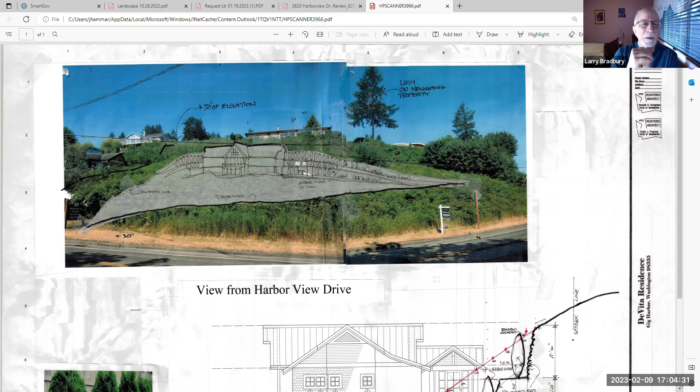Thank you. So what you're looking at on the upper, the dark black line which traverses left to right is the driveway. Approximately, that's high, it's difficult to get this to work in a perspective manner. So the driveway then goes far to the right, turns and returns back toward the house.

And that's where our two walls initially begin. The first one, the lowest one, reaches a height of just 6 feet. The second one, which is set back and is higher, I believe gets around 13 feet or so, and traverses and goes behind the house, as you see on the left-hand side of the house. Those little amoeba-shaped things up there are supposed to be arborvitae.

If you go to the lower sketch that shows the cross section on the site, you can see both walls and their landscaping fronting them, if you will, with the line that traverses across from right to left being the existing grade. And you're looking at what is going to be the grades consistent with the drawings that we submitted for permit. The final grades are there, so it doesn't extend up beyond that upper retaining wall.

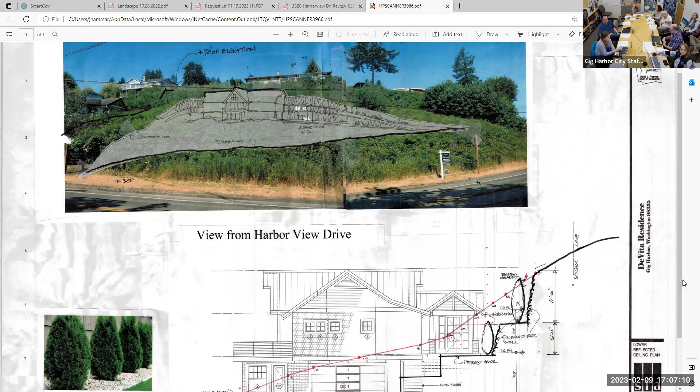Downhill of the house, there's no walls there, just landscape. That grade's all gonna have some cutting and regrading below the house, but not a whole bunch. If you go further down on this sketch, you can see there's a little bit of a cut and fill there, but it's done.

It's not very large and it follows the grades. We worked on that one - I did first, and then the civil engineer worked on it for months trying to get that to work. I think what we ended up with is the best result we could have hoped for.

Landscaping - I forgot to bring it tonight - will be roughly everything you see from the street, the curb that's there, on up the hill will all be landscaped. The plan is to create a landscape that has about 5 or 6 different colored grasses in it, with mass plantings of grasses that make this very soft. There you go, that's it right there.

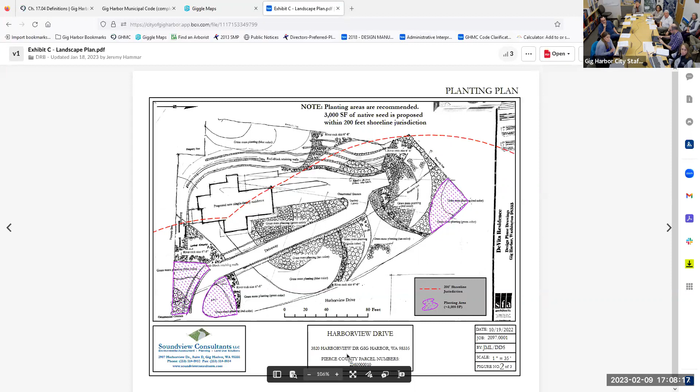That's a lot of planting, that's a lot of grass. Are we talking like bunch grass or? There's 9 different types of grass.

The kind of grass is natural, you don't have to mow it, you just have to trim it. You can see it around commercial developments, around Tacoma Mall - you'll see some of the taller ones and the smaller ones. But the idea is to create a band of color separated in 2 or 3 places with washed river rock, probably 6 to 8 inches across, so it's seen from the road in between some of these rows of plantings.

They will grow every year. You go back in and cut them in October, November, just mow them down - it's a soft landscaping approach.

It's one that, because it is grass, will help stabilize the slope, although the slope is not going to be worked in any way, except for utilizing some of that area for dispersing some of the soil that we've got - about 1,000 cubic yards. That sounds like a lot, but actually when you see it, it isn't that much. It spreads out quite evenly at about 6 to 8 inches.

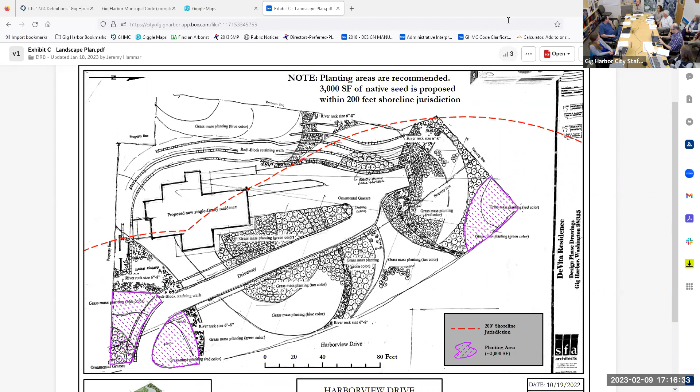Again, even with the height of it, it's just this visual, but I think when we talk about this aspect of the manual, we're really talking about working with the grade. And when you look at the cross section, the house just sits down in the hillside, so I can't think that any one of us would suggest you're not doing your best to work with the grade - it's not artificially extending out.

It looks like it does that job well. It's just the aggressive nature of that first cut. You could start working back up the hill, but you get these diminishing returns.

Yes, but you also have another factor at play here that is real strong, and that is the height requirements. Where it can be taken is about where that upper arborvitae is, and it can only be 18 feet above that point, the highest point in the buildable area. Traverse right to left, and you've got to have a maximum of 27 feet on the downhill side. So that house has been sort of mushed and squeezed to fit that envelope.

Is the highest part of that second wall, when we're looking at this perspective, you have wall to the left and you have house and you have wall coming out finishing on the right hand part of the composition. So is that the highest part? Does it sort of emerge from the house?

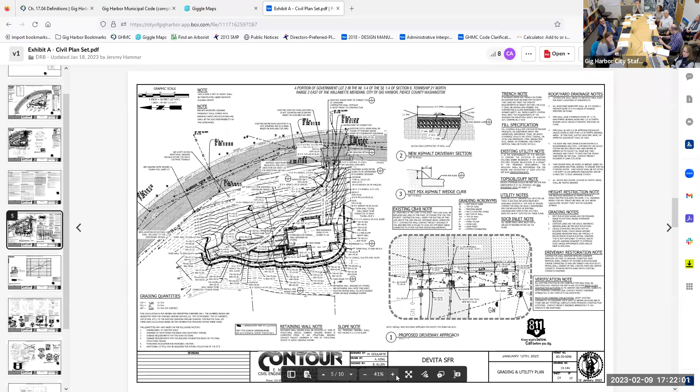Similarly, on the left-hand side, we have the lower wall, which is 6 feet, and the upper one there is about 10 feet of height, and it drops off rapidly. The height of the wall drops down. There's the two walls. In fact, the upper one disappears somewhat on the south side of the house, so you can't see it.

Okay, so I'm seeing - you read them. If we start on the left side of the upper wall, all the way over, yeah, so tapering. So you have a top of wall, the next marker, top of wall 62 and some change, and bottom wall 58. So that's like 4.5 feet, and then it gets to where your cursor is, we're talking about 9 feet roughly, 9.5 feet.

And then we're getting into maybe 11 feet. Maybe 12, almost 12, right? Yeah, right in there. And then the next one over, about there, yeah. And that one, another 12. Another 12 or 11. And then that one there, back down to 11.

Okay, yeah, and then 6, that one here. Is that 68, 73? Yeah. Upper wall down to 62. That's only 6 feet there, so that's a big drop there. Yeah, so it's about 12-ish, and it's for a little stretch in that zone.

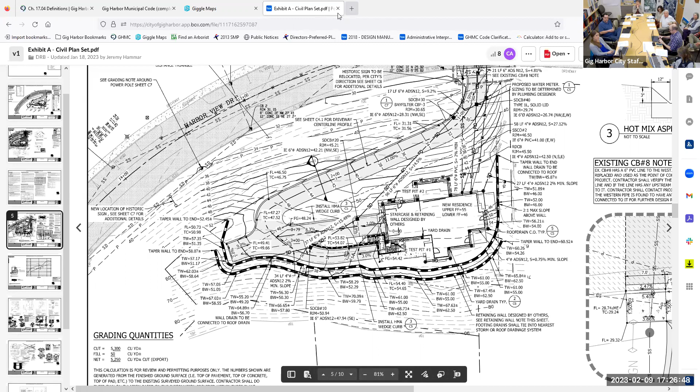Let's go back to the section through the site for a moment - Cindy, there you go, the lower one. That's the question - you see the far right-hand line, the dark line there, it comes up rather rapidly, then starts to level off. From what I understand, and I've only stood up there once, crawled up there actually, from your view up above, you probably won't see any of the arborvitae. You will see the top, the roof of the house. Yes, definitely you'll see that.

But I think the arborvitae are going to stay within the confines of the height of the wall, so as long as she keeps it - is it illustrated there? Is that an 18-foot tree in that back, or what do you have? It shows - I called it out at 11, I can't see it from here, it could be any number of different things. On the right-hand side, there's a dimension, 11.5 feet.

Okay, well, thank you for your comments. I don't know if you have any more - if you do, let me know, I'll add my own comments to it. Obviously in the View Basin, we do have height restrictions, very stringent as city standards go. In this case, 18 feet maximum height from the highest point. So basically, the way to determine it, they have buildable area, basically the setbacks. You can measure the highest point at the finished grade - that would be within that, you can go 18 feet, and then no part of the house, as you descend down, can be higher than 27 feet max. So it really pushes the house down, and I would think that although we, as a DRB, have not talked about landscaping in regards to blocking views.

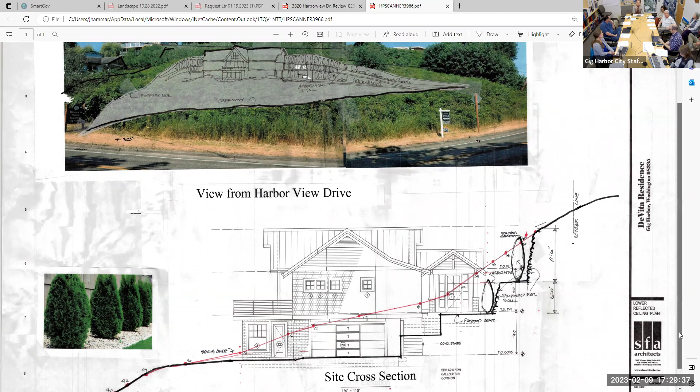Well, we actually have a covenant with this property—DeVita's kindly trimmed the trees. Thanks for educating me on that, so it shouldn't be a problem. They're hedge-like, and they can easily be manipulated and sculpted as they grow.

I think our concern is to reduce the visual impact of that wall as you're looking up from Harbor View, coming around. The pile-driven wall has a different aesthetic—it can look a little like shoring, less architectural. Part of me was thinking, could there be some kind of architectural fence or something in front of it that looks more like the flavor of the house, or an extension of the house? Because the walls often do this irregular dance up on the hillside, and once it gets that big, it almost looks like a physical form of a house, especially with the pressure treated timbers between it.

So steel columns, 6 foot on center, pressure treated timbers, and maybe less arborvitae in there. I just have a feeling it might look a little like shoring to start with, unfinished. Maybe I'm wrong, but if we had some images of shoring like that—what are you guys getting the same sense I'm getting?

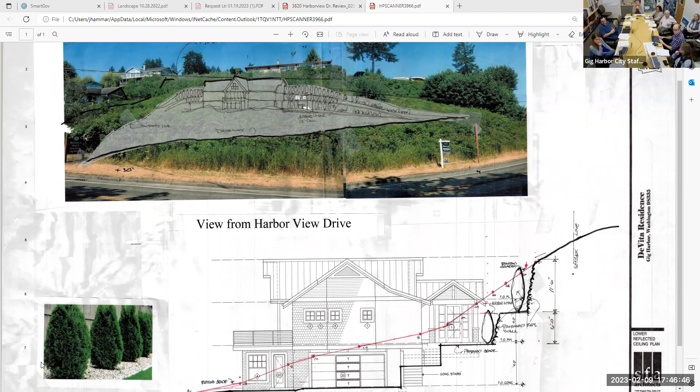I know you're coming in a little late, but we reviewed the heights of the walls from the civil drawings, more specifically. So the lower wall, as you can see on the screen, the one that has the arborvitae, the oval-shaped plant in front, that's a 6-foot wall, so that meets the prescriptive requirement. The one above it, at its highest, or just a stretch through there that's visible, gets about 11 or 12 feet. That's as high as it gets, then it tapers down to 6 or 4 feet at the end. So if you add the two together, yes, you're kind of talking about those heights, but it's really the upper one that we were keying in on. So it's not as dramatic as maybe we initially were thinking, in these 14-foot kind of heights.

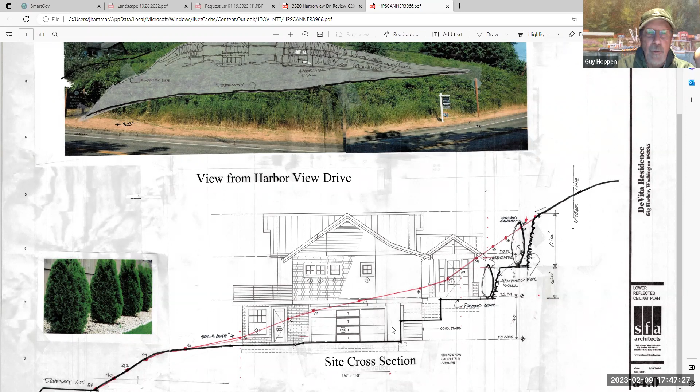Point taken, but I think the visual effect will basically be an 18-foot wall. That's what I'm seeing on the rendering, and that's what I see as I drive by these other walls. One of them is a split wall like this, and the visual effect of it is the total, not really shorter - it's the same thing, a shorter wall and a taller wall. It's roughly the same amount of wall, and it's way prominent. It's the most prominent thing on this side, the east side of the harbor.

I think you make a good point. If we allowed an applicant to come in and do 3 or 4 six-foot high walls cascading, they could in essence create something that's 24 feet high visually without any plantings in front of it. Visually that wouldn't be as attractive. So I think in this case, trying to mitigate the walls with intended landscaping is good. We've got a lot of examples where we don't have landscaping helping to soften those. These are challenging, I get it - you look across the bay at the Pierce County side and there are some monstrosities over there.

Can I ask a question that's almost off topic - well, not really off topic - but if the technology of the wall is such that the engineers and architects feel it's going to hold that hill back, why couldn't the same technology be used to wrap the house as a foundation, and then you'd meet the ultimate goal? You'd lose the wall, you'd meet the design criteria on 17-192 and 17-218. It would seem, if it's good enough for a wall, it seems like it would be good enough for a home's foundation as well. Then you could basically meet every design criteria.

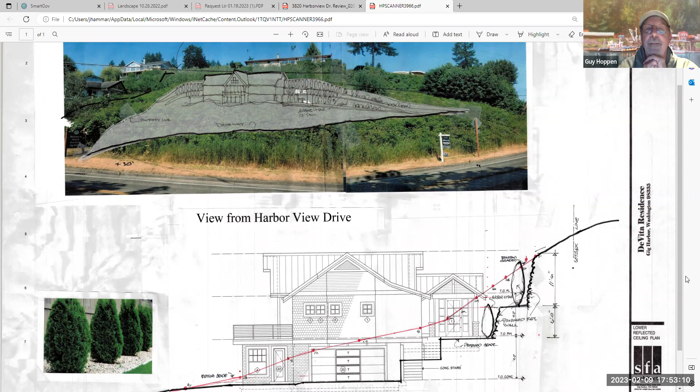Okay, we'll call for the question. All in favor? Aye. You can abstain or vote no. I'll dissent, I'm not comfortable with it. So, do we want to take that as a no? Okay, fair enough. It passes, there's enough votes to pass. That will conclude, in essence, two sections for the criteria to meet approval.

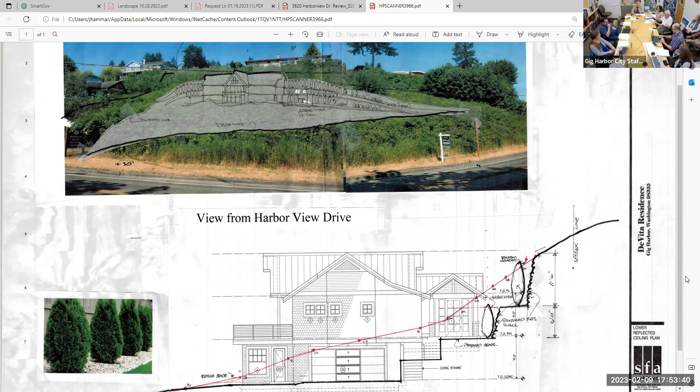And I want to thank the applicant for taking the time to try to get some visuals for us on this. It sounded like a pretty challenging task, trying to give us a sense of what this is going to look like. We wish you luck in developing the property. Everybody's eyes will be on it, so keep that in mind.

So when the wall goes in, if there can be a first phase of landscaping - this is off the record, beyond what we just approved - I would just keep in mind that the city and its constituents get sensitive to dramatic changes all at once. So you have to have thick skin a little bit and eventually it gets better. Just keep it in mind as you develop.

We're just the designer viewpoint, a recommending body. We still have more things to accomplish. Anything else on the application? You'll have to wordsmith some of that, sure. So you're free to go if you want to, and I think we can just wrap up with a little bit of business.

Thank you. Thank you for your help in getting this passed. It was a really tough project to do, so appreciate your helping us.